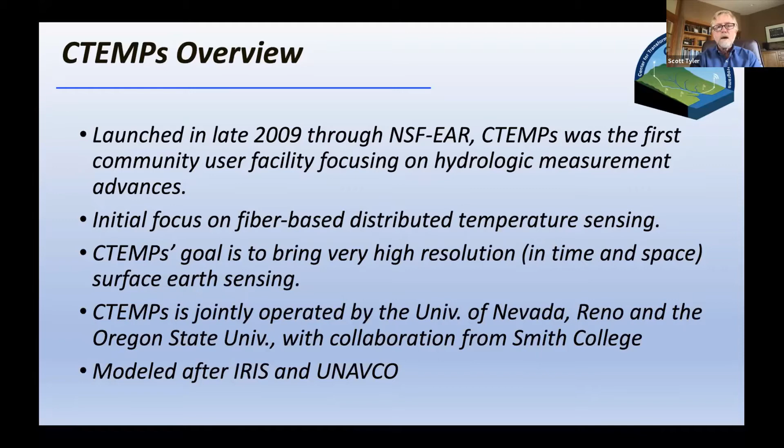And so our goal is to bring high resolution, both in space and time, surface Earth sensing. And you'll see we do some other things as well besides distributed temperature sensing. And again, it's jointly operated, funded by the National Science Foundation, at the University of Nevada, Reno, my home, Oregon State University, and also Smith College in Massachusetts. And we basically modeled ourselves after the successful instrument centers in earth sciences, IRIS PASSCAL and UNAVCO. So you'll see a lot of similarities. We are just much smaller than they are.

So currently, CTEMPS has a fleet of 11 completely field deployable distributed temperature sensing systems. And we have some higher resolution laboratory grade instruments that can also go out in the field, but just require additional power. We maintain a complete inventory of fiber, both single mode and multi-mode. We supply fiber splicing, supporting equipment, everything an individual or a team would need to use a distributed temperature sensing operation in the field. We maintain a data management system and storage of all data that comes in. It's freely publicly available as well.

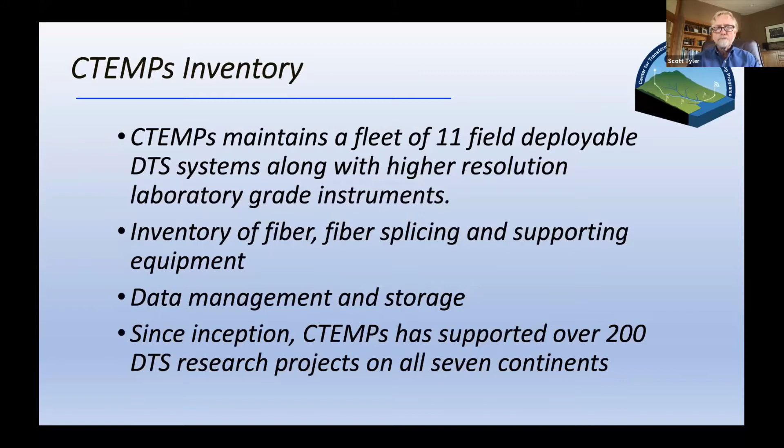And since we started, we've supported about 200 distributed temperature sensing projects, and we've been able to work on all 7 continents with those. So this is just an image of what one of our instrumentation boxes looks like. It's completely weather tight. All the data comes back by cell modem if you're within cell service. And we maintain the data for our users. It's completely self-powered, solar powered. And in this case, researchers were monitoring a stream system in Northern California.

And we've evolved from just distributed temperature sensing. We still focus on all aspects of fiber-based temperature sensing, as well as now you'll see a little bit of distributed acoustic sensing. Also, with that idea of focusing on high resolution space and time measurements, we've developed a UAS program that is available for the community to use. We focus on high resolution topography, hyperspectral imagery. The image to the right there is our airborne magnetometer, and we do thermal sensing. So if there's a need in your community for that, we can supply those kinds of instrumentation to you.

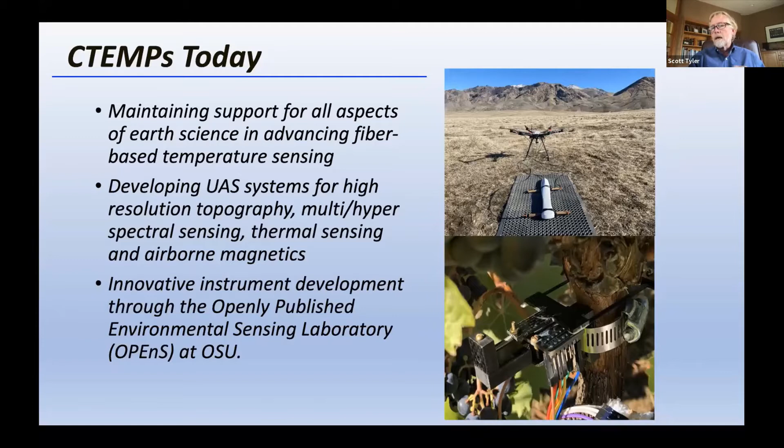And then we've also just in the last few years developed an instrument development laboratory called OPENS, Openly Published Environmental Sensing Lab. And this is designed for users to develop low cost instrumentation and sensors for, again, environmental sensing. The one to the right here happens to be a very low cost dendrometer, which is a technique to measure the change in diameter or circumference of plants, trees as they're growing daily. And we can use these instruments to look at water stress and vegetation. Normally they're very expensive. The idea is to make these things cheaply, quickly, and have users come in and actually work in the laboratory to build the instruments that they need.

Like everybody, we have a website. So this is what you would go to. You can request instrumentation. It's quite easy, much like if you've requested nodals from IRIS PASSCAL. You tell us what your experiment looks like, what you might need for instrumentation. If you're not sure, you just put down, I'm not sure.

And one of the focus things that we do is we try to work with all of our clients, if you will, to help design distributed temperature sensing or remote sensing experiments in the field. We keep a pretty robust list of publications that are related to distributed temperature sensing, as well as unmanned aircraft. So feel free to take a look there.

And then we do training. We do workshops, usually 2 or 3 workshops a year, always at the American Geophysical Union. We'll have a distributed temperature sensing workshop, hands-on. And we also support folks coming into our lab, either of our labs, to work hands-on to get practice with the instruments before they go out.

Because recognize in hydrology and in near surface, many people are very unfamiliar with how optical fibers even work. So bringing everybody up to speed has been one of the things that we've focused on, I think, fairly successfully. So I don't think I have to go into too much detail of how distributed temperature sensing works.

We do a quick shot of light down an optical fiber, and in our instruments we're looking at the Raman backscatter, which is a function of the temperature of the region that the scattering occurs. So essentially DTS is LiDAR, is inelastic LiDAR in an optical fiber.

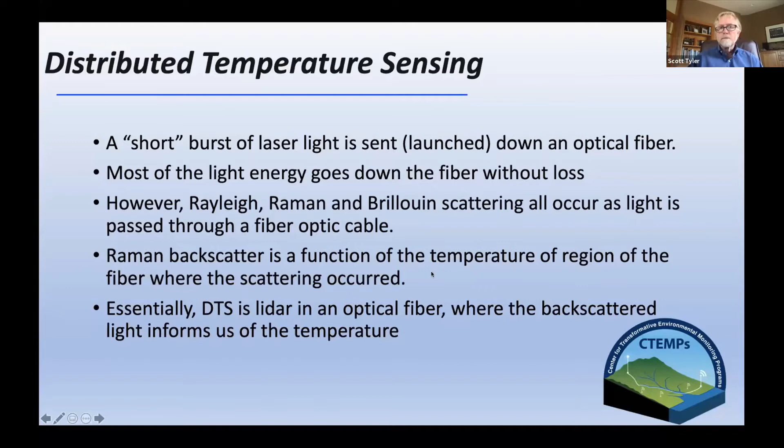Hello, come on, where'd we go? There we go. I think it's okay.

Just to give you an overview of the instruments that we maintain, obviously there's a lot of distributed temperature sensing instruments out there. Typically, the instruments we have will measure in a single channel, usually up to 10 kilometers of fiber. They're usually 4-channel instruments, so you can monitor up to 40 kilometers of optical fiber.

The instruments we have will resolve temperature differences, typically now down at 50 centimeters. So our spatial sampling is 25 centimeters, and our resolution is usually of order twice that, so about 50 centimeters. For most of our environmental applications, we're measuring temperature averaging over, let's say, a 10-second interval or maybe up to a minute, but we can go down to 1 hertz sampling.

And with the instruments we have, we can easily resolve 50 millikelvin differences in temperature, and we can get down to 10 millikelvin quite easily if we integrate longer. So in an environment where the temperatures are changing more slowly than our sampling interval, we can get it down to resolution approaching what oceanographers and others are interested in.

Everything is field deployable, and we now have instruments that will operate at down to 1 watt in daily use. And that was in collaboration, working closely with the folks at Silixa, who I think I saw Thomas this morning on the call. That was a demand for our community, particularly working in polar regions. We really needed to get the power requirements down so that we could leave these things out through Arctic or Antarctic winters.

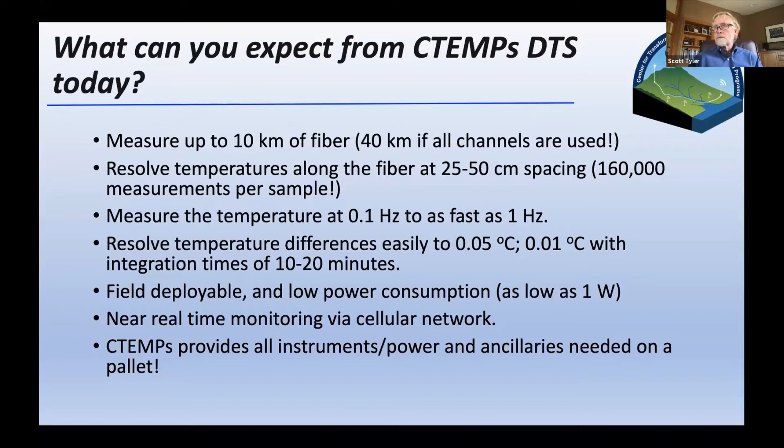Again, everything comes back by cell phone to us, data, so users don't have to worry too much about that. And again, we provide everything that a user would need out in the field for remote installation if needed. So I just want to show you one example of where DTS has been making some fairly significant breakthroughs, and that's in the cryosphere, particularly in the ice shelves of Antarctica and also to some degree in Greenland.

And if you're familiar with Antarctic ice shelf behavior right now, the big concern is that the ice shelves of particularly West Antarctica are being melted rather quickly, and these ice shelves actually buttress the much larger ice sheets that lie upstream of the ocean. And as the shelves begin to degrade, these ice sheets that are upstream can become destabilized and essentially fall apart.

And we've seen this, in the popular literature anyway, we've seen some of these big shelves calve off. The issue in West Antarctica is that because of the topography of the grounding zone of these ice sheets, once this process starts, it can actually run away, and the entire West Antarctic ice sheet could indeed enter the ocean.

And of no concern of the ice that's below sea level, but a significant amount of the ice in West Antarctica is, of course, above sea level. That will cause sea level rise. The challenge is, how do we measure what's going on? Most of the melting is occurring underneath the ice, so from the bottom of the ice shelves.

And this image is greatly vertically exaggerated. The distances here from the edge of the ocean, ice-ocean interface at the sea ice back to the grounding line where the ice is finally on the ground, can be hundreds of kilometers, typically 100 kilometers, or can be much larger. So how do we monitor what's going on underneath this in the ocean, and again, the melting that generally occurs from the bottom of the shelves?

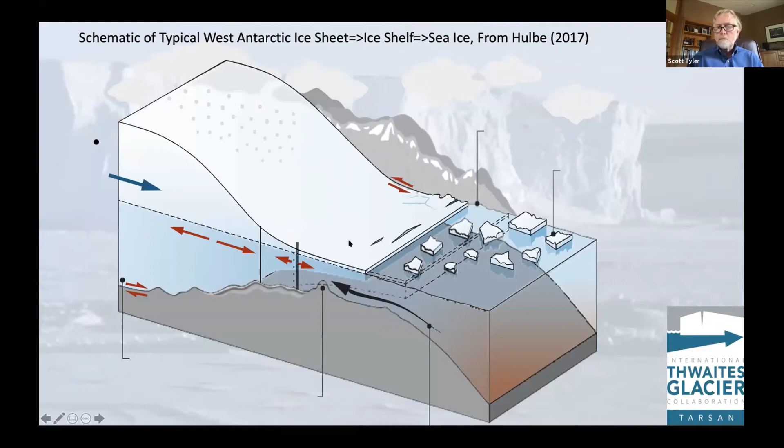There we go. So what I'm going to show you right now is some data from a mooring. This happens to be on the Ross Ice Shelf, where we've drilled through about 200 meters of ice, and we installed a mooring system down through the ice into the ocean below. And in that mooring, in this case, there's multi-mode fiber. There's also single mode fiber, because we want to go back. All of our installations these days include both single and multi-mode fiber, so we can do acoustics on anything that we have installed.

And what I'm going to be showing you is then the evolution. The bottom graph here is the ocean, underneath 200 meters of ice, what the temperatures look like. And then the top graph, let's see if we can get this to work, and I can talk through it while it's going. The top graph is actually the ice thickness above. And so this instrument is measuring as we go along in time, and remember, we're in the Antarctic, so February is summer, you can start to see warm water coming in underneath the ice. These are continuous measurements every meter in this profile.

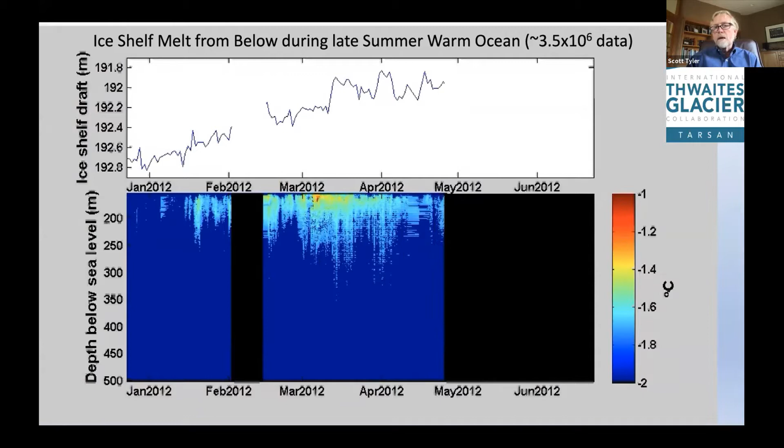And when I say warm, ocean temperature here is minus 1.9 degrees C normally, and we're getting up to perhaps -1. So that's warm water for Antarctica. And you can see it comes in, and then as we move back into the wintertime, this warm pulse of water, which comes in underneath the ice shelf, is pushed back out due to processes underneath the ice shelf.

But what we're interested in is measuring the melt rate of the bottom of the ice. And with DTS, again, our spatial resolution is 50 centimeters, maybe 25 centimeters in a good instrument. And here we're measuring ice melt that might be 1 meter per year. So our spatial resolution is insufficient to capture the melt rate at this particular site. Many other sites are melting at tens of meters over the summer, so normal DTS works fine.

So what we did here was, and this is one of the advantages of DTS, look not just at individual temperature measurements, but at the thermal gradient, particularly in the ice, and how that changes as the bottom of the ice shelf is melting upwards. Because we get very high spatial resolution, we can resolve the thermal gradient as we approach the ice-ocean interface very well. And we also happen to know, fortunately, the temperature at the ice-ocean interface. It has to be at the pressure melting point of seawater. And we know the salinity, so we know that temperature exactly.

And so as a result, we can then map where that thermal gradient intersects the pressure melting point, and we can now resolve ice shelf melting rates of order millimeters per day. So this is a little less than a meter over the entire 6 month time period. But we can measure melt rates of a few millimeters per day, which is impossible to do otherwise. No other way to do it. So kind of interesting, kind of cool stuff.

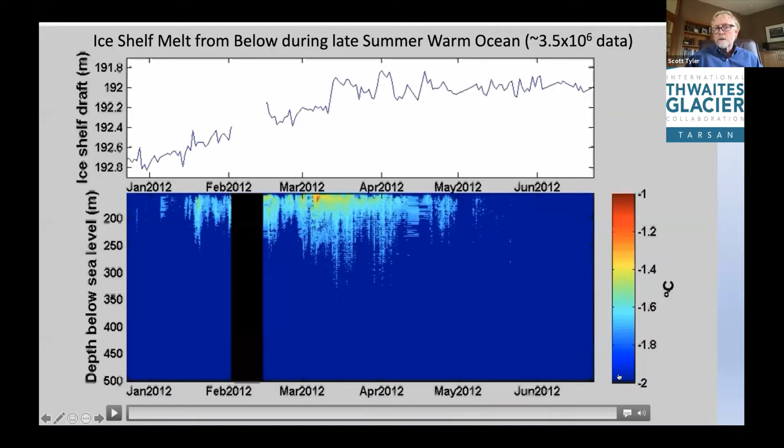Let's see if we can move forward. I just wanted to mention that.

So we have another set of experiments going on at the Thwaites Glacier, which is West Antarctica. Here we have 2 moorings where we have temperature measurements over the last 2 years from the ice-ocean interface, the ice and the ocean. That's been continuous, and now we will be going down this field season to measure. We also have single mode fiber there, so we'll be doing vertical seismic profiles in those moorings that are through the ice to measure ice properties, and we'll do some surface shots as well.

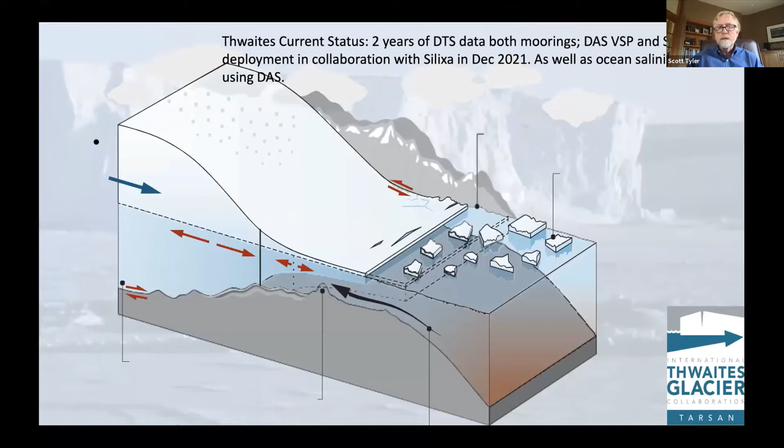We hope to be able to resolve differences in salinity in the ocean column below, which is also really important to identify ocean currents and ocean waters that are melting there. So that's ongoing.

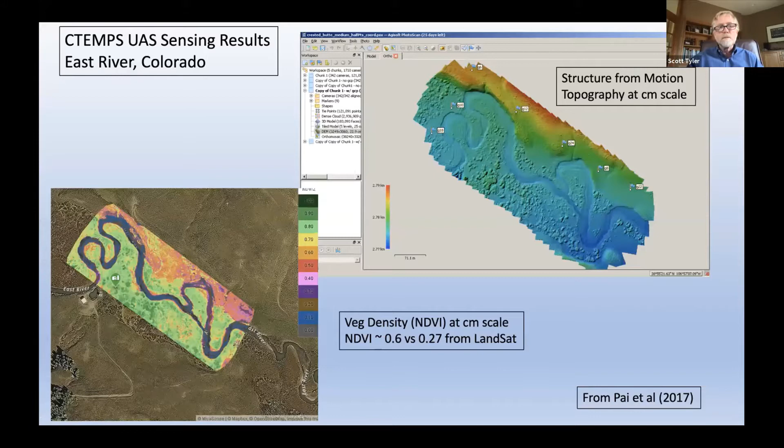Just really quickly, CTEMPS also does remote sensing. I just wanted to toss up very quickly that we do topography. This happens to be some work for Lawrence Berkeley Lab that we did in Colorado, looking at topography of streams. This is looking down. And then we also do very high resolution multispectral imagery to look at vegetation health. Those are all available. All right, so that is CTEMPS.

Let me quickly move on if I still have time. I don't have a watch in front of me, but we'll keep going. Brady will tell me when to stop.

A few years ago, Wang from the University of Wisconsin, IRIS folks, and us got together and said distributed acoustic sensing is a game changer for earth scientists, and we need to help promote this in the field. The National Science Foundation has a program called Research Coordinating Networks, or RCNs, designed to either advance a field or create new directions in a field by coordinating people working in that area. It's not designed to do primary research; it's designed to bring people together.

So we started up a year and a half ago with a DAS Research Coordinating Network. Several of the people in this workshop today are part of that, and we really appreciate their contributions. I want to encourage you to participate. Many of you on the engineering side may not have been aware of this as much as the earth science side, so please get involved. We have a steering committee. The goals are to bring together the DAS communities, research, industry, technology companies and agencies, and see how we can apply and advance applications of DAS in geoscience and engineering.

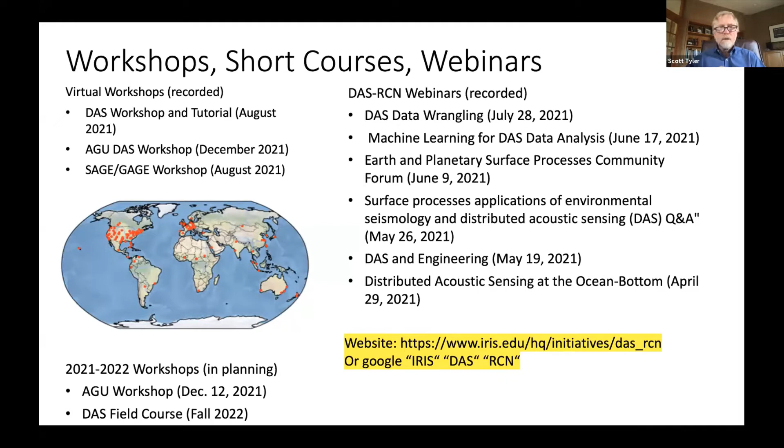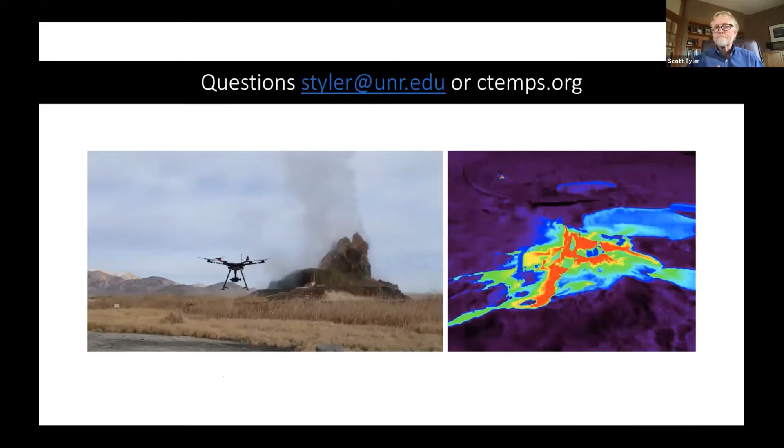And with that, I will close and take questions. Since there are a few geothermal talks, I thought I'd throw up a picture of a local geothermal feature and its thermal map as well. So thank you, and we'll stop sharing.

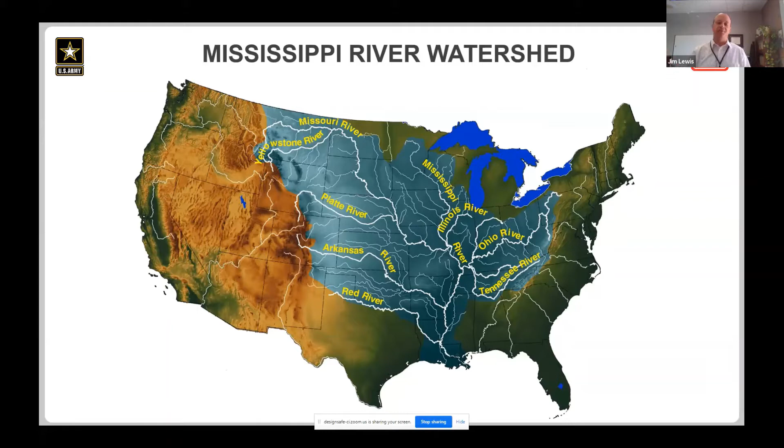I want to mention the 1927 flood. So this was a very important flood in terms of the history of the Mississippi River. It was devastating, a lot of damage, a lot of people that died, and a bunch of people that were forced out of their homes, a lot of refugees, and there's a lot of history in that event and how the whole nation was impacted by that event.

So the 1927 flood was a big event, and it resulted in the federal government deciding we needed to do something at the federal level. And so the 1928 Flood Control Act was really motivated by that 1927 major flood of the Mississippi River. And so in this act, Congress gave the Army Corps of Engineers the authority to do flood risk management on the Mississippi River through this MR&T authority. So it's the Mississippi River and Tributaries Project.

So just a couple snippets from some of that language. One of the things that it did was it put the Mississippi River Commission and the Army Corps of Engineers together, to work together and perform this task as a unit. And that still happens today. And that last bullet talks about trips up and down the river, and that also still happens.

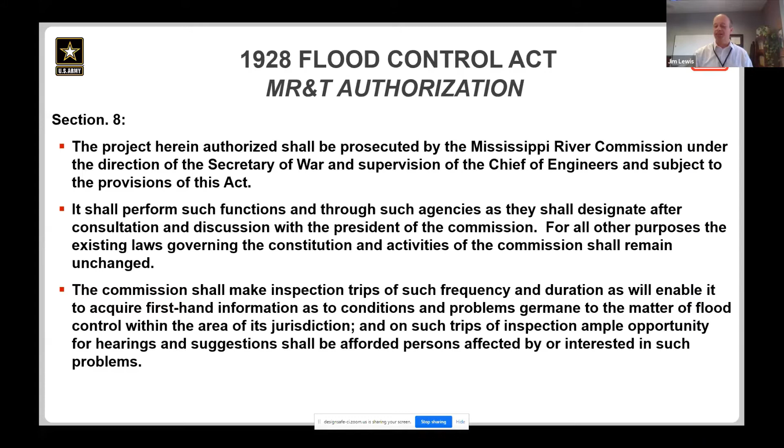So twice a year, once during higher water, once during lower water, the leadership for the Mississippi River Commission and the leadership for the Army Corps of Engineers get on a boat and they travel down the river and have stops in cities and towns along the way to hold public meetings, allowing folks to voice their concerns and their perspectives about the job of managing flood risk in the Mississippi River.

So after the 1928 Flood Control Act, the Army Corps of Engineers became much more involved in levees, levee design, levee inspections. That figure on the left just shows how they were designing different slopes for different materials. The top figure shows a cover of a book that was standard instructions for levee inspectors in the Vicksburg district from 1929. That figure in the top right shows construction methods have changed a lot over the years and how they moved the dirt around. That figure in the middle right shows an old sand boil that they were dealing with.

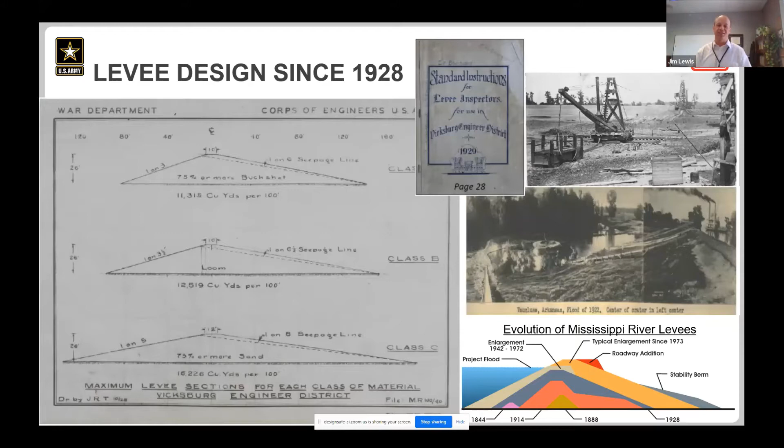And then that figure in the bottom right, I just want to highlight that there's an evolution that's happened in these levees over time. They started with some part of a levee, and then that's grown or been built on over time, so that it's evolved into the current form.

This slide has a lot of information in it. So the Mississippi River and Tributaries Project is not just levees. There are actually 4 different major features of the MR&T project. Levees and floodwalls are, of course, a big part of it. But also there are floodways and backwater areas. Those are listed on the bottom left, and they're also shown in that middle map as well.

So at the upper end of the system, the MR&T system has a geographical extent that starts at about where the Ohio River and the Mississippi River come together. There's a city there called Cairo. The floodway right there at that location is called Birds Point-New Madrid floodway. That one is kind of a release valve to have flow come off of the Mississippi River. And the key with that one is the timing.

So the water that comes into that floodway ends up back in the river, but it is intended to knock the peak down. So that one is all about the timing to take the peak of the event lower in the system. And then as you walk down the system, there are backwater areas. These backwater areas are intended to give the river room. As the extreme flooding happens, these are locations where it's intended to flow out of the river and into these areas to take water.

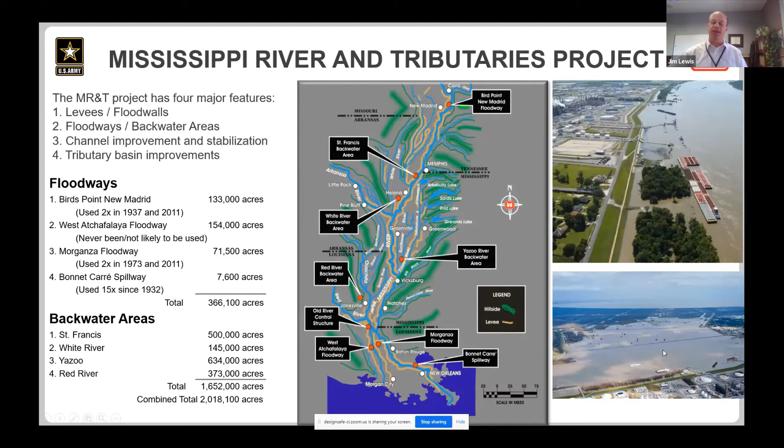And then this is my last slide. The Mississippi Valley Division has a science program known as the Geomorphology and Potamology program. Potamology just means the study of rivers. Through that program, we perform a wide range of science, and the levee research that you'll hear about in later presentations is funded through this program. We recently completed the Flowline Assessment to calculate what the water surfaces would be all the way through the system for the project design flood event.

We also track sedimentation trends. There are spots where over time, for the same flow rate, water surfaces are going up, and other locations where they're going down. We also look at basin changes in land use and water yield. The top right figure shows a numerical model example of how we're improving our tools to simulate hydraulic and sediment behavior. The bottom right figure shows threatened and endangered species whose habitat values we work to improve. But the levee research is important.

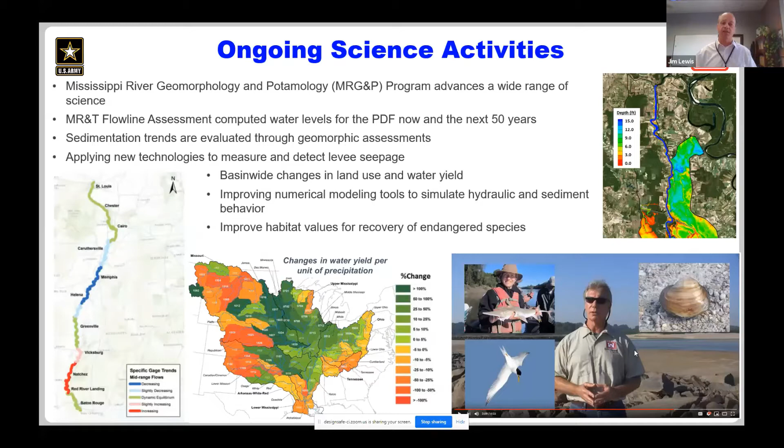During a flood event, there's a lot of activity that we as the Corps perform to monitor the thousands of miles of levees that we have, inspect them, look for seepage concerns and potential sand boils, and deal with those. So I hope this overview of the Mississippi River and motivation for levee research has been interesting.

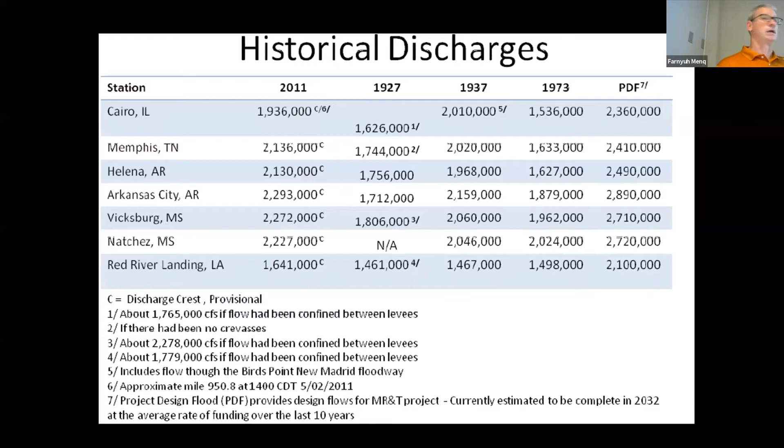So here are peak flow rates through the system during this event. And the thing to notice is if you look, for example, at Vicksburg, the flow rate is the highest we've seen and the highest since 1927, even higher than what happened in 1927. So the system, for much of it, was loaded beyond what it had ever been loaded before. The places we're going to look at are the old river control structure, the Morganza Spillway, and then right here near the LSU campus at Duncan Point.

And here's the old river control structure. This was built in 1964. That center gate is the main part of that structure, and it separates the flow of the Mississippi. 70% stays in the Mississippi Channel and 30% goes into the lower Atchafalaya. When there's a flood, they start sending more water into the lower Atchafalaya. And during 1973, they were sending water through that structure, and a 30-foot deep scour hole formed at the toe of that structure, and there was a distinct possibility that they could lose that structure during that event.

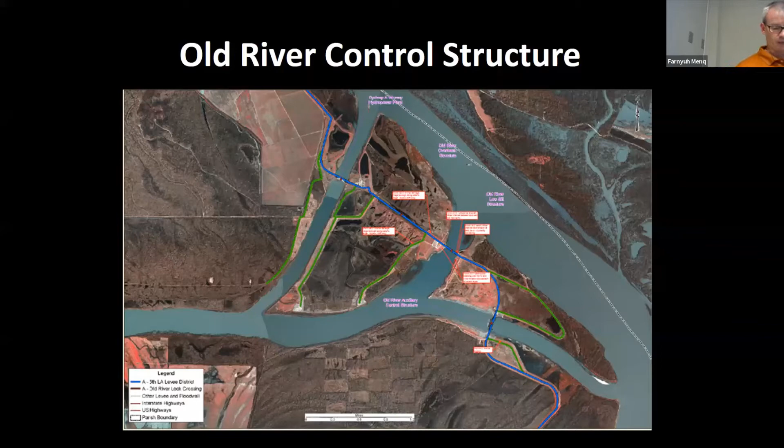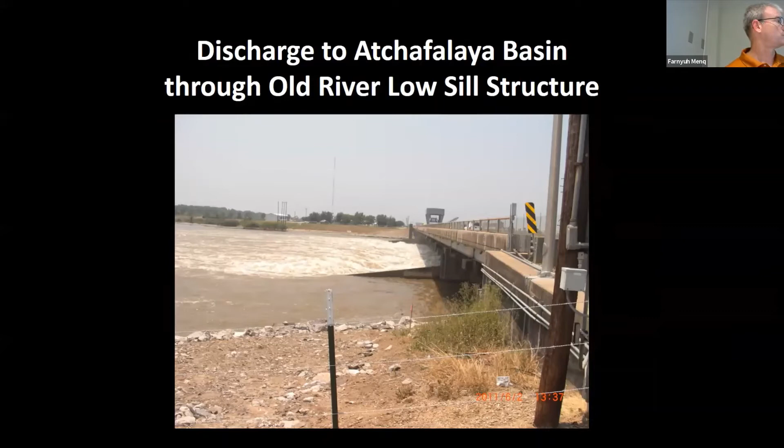So they added the auxiliary structure above that in order to try to control the flow rate going through that structure. But it's a significant structure because if you lost control at this point, you essentially lose control of the Mississippi River, and it would bypass Baton Rouge and New Orleans. So here is that control structure in 2011. It performed well. It performed in the way it was intended to perform. So that was a good news story here.

The Morganza Spillway is a little bit further down. And here the Morganza Spillway, again, is at pretty much its capacity in terms of discharging into the Morganza floodway, which is about a 5-mile floodway before you get back to the Atchafalaya River. And again, this structure in this particular event performed well, but it was dealing with very, very high flow rates, very significant potential for erosion. And so understanding what's going on in these structures during these events is a very important part of making sure that things are going to go well.

And then when we get down here near the LSU campus, here's what the levee looks like. This is on the east bank of the river. The flood levels along this stretch of levee in the vicinity of the campus and going all the way up to the old river structure were at the freeboard. So they are at the highest level that's intended. In some locations, it got above the 3-foot freeboard, and so they were adding sandbags and HESCO baskets on top of it to increase the freeboard temporarily during the event.

And you saw a schematic of what these levees generically look like. I'm going to talk about what's underneath them. So there's a blanket layer that's fairly fine-grained, and then there's some more coarse-grained materials, and then a substratum sand layer. And so what we worry about is the seepage going through those layers underneath these levees, potentially causing internal erosion or potentially causing instability. And here's an example of that seepage. Just happened there.

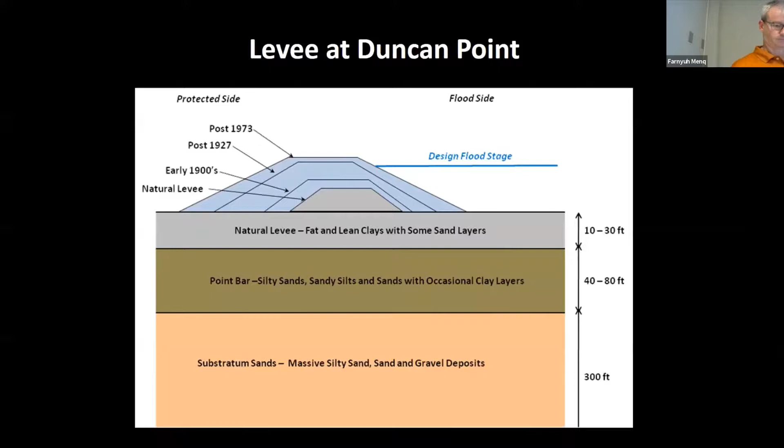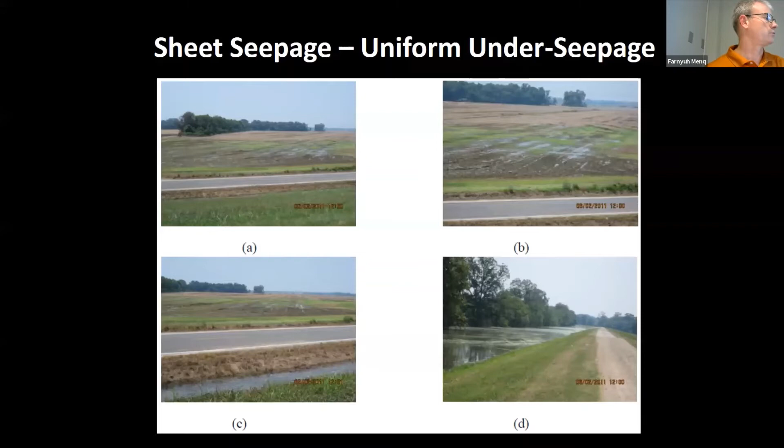So sheet seepage is the best example, where the water is coming under a fairly low gradient. It's not concentrated, and it's basically just coming to the surface at the toe and beyond the toe of the levee. So here's an example of that. This is just north of where we are right now, and you can see that field is filling with water, but there's not a concentrated flow through a particular feature.

The next feature are these sand boils that Jim talked about. So there were about 30 of these that developed along the system during the 2011 flood. During the flood event and the flood fight activities, what they do is they either pile sandbags or they put barrels on top of these sand boils so that the ground surface has a water head on top of it at that location, which slows down the flow rate. It slows down or reduces the gradient and hopefully reduces the erosion that's occurring.

You can see here one where they've placed the barrel, and another one that right after we were there, they put another barrel over that sand boil. These are interesting. They're right along the line of a utility. And so we don't know if maybe there were utility poles that used to be at these locations that they've removed, and that something that we did put holes through that natural blanket, or if there are natural features that cause them.

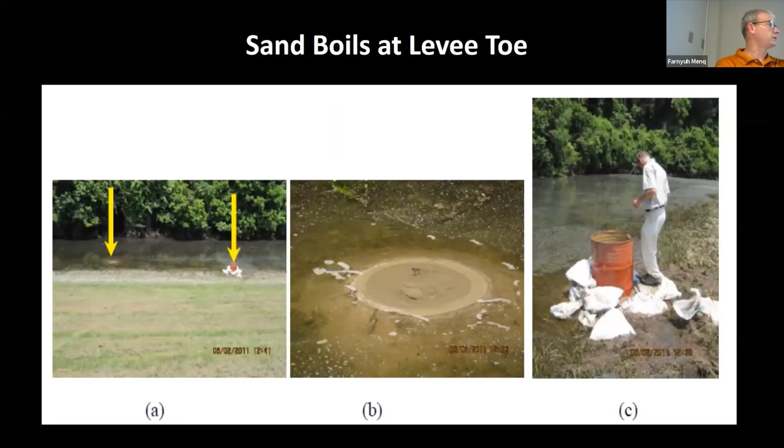One of the interesting things about this flood event was that there were locations where they've had sand boils before, and we found sand boils again. There were locations where they had never had sand boils before, and new sand boils formed. And then there were other locations where in the past they had had sand boils, and sand boils did not form in this flood event. So it's not only variable spatially, it varies with time.

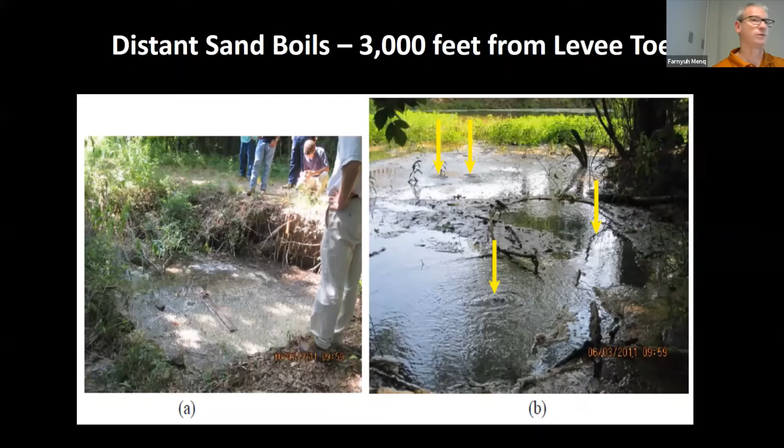And then there are some of these distant sand boils. These were really interesting. This is 3,000 feet away from the levee, just south of here on the east side, where sand boils formed. And it's not that big of a deal, potentially, in terms of the stability of the levee, although obviously water is going, and if you've got piping, it's over a large distance away from the levee. But these sand boils can form in areas where there are other things, like here is a berm that supports a pond. So potentially that berm could have been undermined.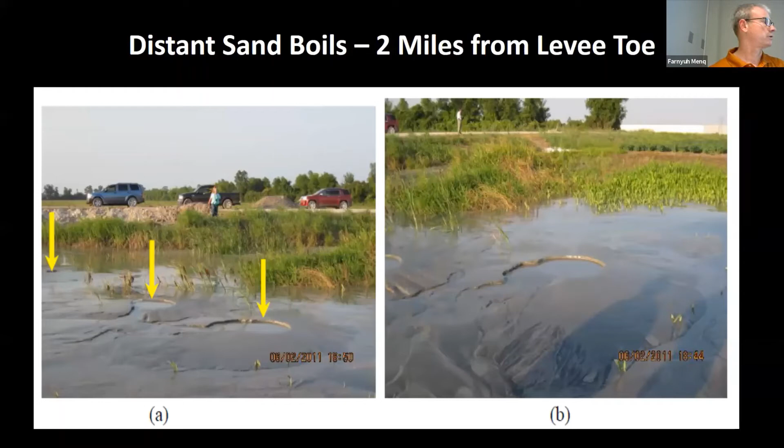And here we're 2 miles away. This is on the west bank, but 2 miles away from the river. You have dry land. We drove over it. We get to this point, and the water has popped up and actually taken out a road at this location. So it's a really, really interesting geologic setting that we're dealing with.

And the way that they try to address problems where they're getting seepage or they're getting sand boils is they extend the width of the levee with seepage berms. They put relief wells down into that substratum sand, but it's very much of an observational approach. They see where there are problems, and then they put these features in to try to improve the capacity of the system based on what they're observing. But it would be a much better approach if we could figure out what's really going on in the ground and be proactive about making those levees as strong as possible.

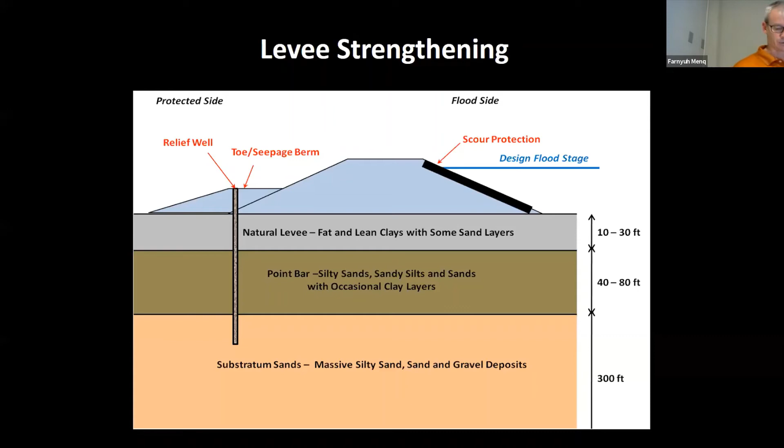So in summary, we had a historic load on the system. It performed very well. It's spatially variable though, it's temporally variable, and I think there's a lot of potential for what you all do that could improve our ability to make it a better system. Thank you.

Okay, thank you for that, Bob, for helping us set the stage. We have another presentation up next that I think will go further to set the stage for the specific section of levee that we're talking about. We have Brian Jordan, who's going to speak to us. Brian is with the Vicksburg District of the U.S. Army Corps of Engineers, and he is the Analytical and Levee Safety Section Chief for the Vicksburg District. And so Brian will be talking specifically about the section of levee that we'll be visiting tomorrow.

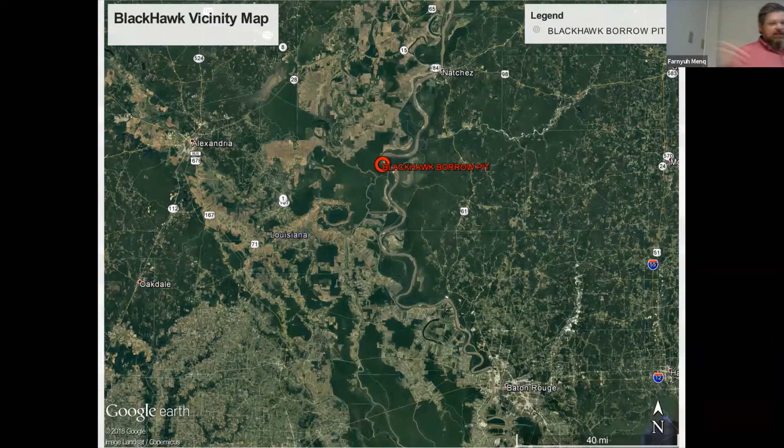As you can see, Natchez up north. It's pretty far north of Baton Rouge from here, and then directly east of Alexandria, Louisiana. This is really what I wanted to get in on, the important part of where the location is, because any kind of breach along the Mississippi River levee is an issue. But this one was 10 miles north of Old River Control Structure. As you see, just to the west there is the Atchafalaya River.

So you can imagine that a breach on the mainline Mississippi River levee at this location would dump water directly into the Atchafalaya. And there's also quite an elevation difference between those two. So there was a potential, and we didn't even get close to realizing this potential, of partially and temporarily rerouting the Mississippi River down the Atchafalaya. Obviously, it got a lot of people's dander up. So we were sent out to take a look.

And as you can see, that's very telling. There's a sand boil that's lipping the top of the water. You could actually watch the waves break on the sand. And as you got on top of it, you could actually see the material rolling in the throat. We sent a team of surveyors down with a multi-beam drone boat. We got this imagery. As you can see, it's obvious, right? There's a large sand boil. This pit was 8 to 11 feet deep. So that is an 8 to 11 foot cone of sand with a delta.

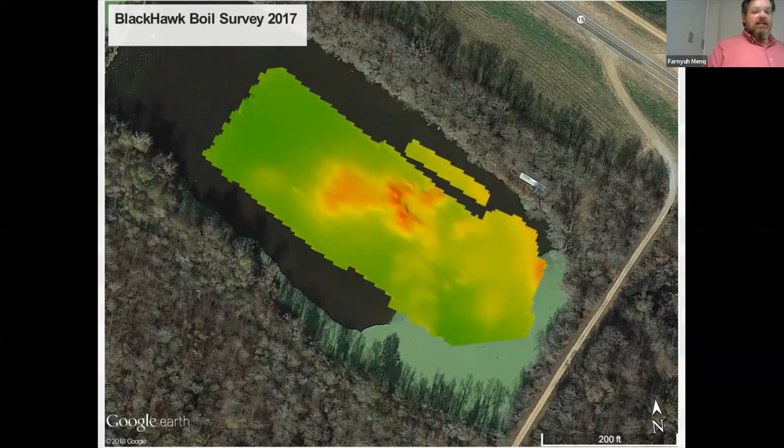So we knew, given the location and the situation, that we needed to do something, and we needed to do it before this flood wave hit. Luckily, with the Mississippi River, we had time. We had about 3 weeks to plan and execute our remediation. So we started off with, what are we dealing with? The geology. We went and looked at some tertiary borings and geological maps.

So you can see we're in a back swamp area that has got a lot of natural levee, not your usual sand boil location. And the boring you see there on the right gives you another indication that we shouldn't be seeing boils in this location. It didn't make any sense. That top stratum was 28 to 35 feet thick.

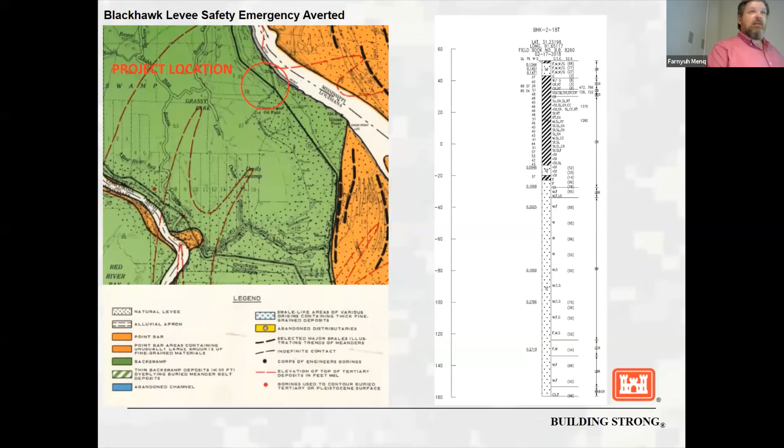Usually that's all you need and you're fine. You'll never put a relief well, you'll never have to berm, it'll be fine. And yet here we had this massive sand boil. So we sent our CPT crew to go push some cone penetrometer tests, for those of you who don't speak the acronyms, at the landside and riverside toe.

And this one caused a couple of hats to drop. Those are sand layers that are 5 feet below the ground surface. What? This would cause a serious seepage issue. But it did not make any sense in conjunction with the sand boil we saw. The elevation of the effluent of the sand boil, down there at the bottom of that pit, was well below these layers. So, you know, the water flows down in elevation, then up. Didn't make a whole lot of sense.

So we did something that we typically don't do, and we pushed a CPT through the center line of the levee. We don't like messing with the levee section itself, but in this case, it seemed like the right thing to do. And thank goodness that's not what was going on. These sand layers were only found at the toes and not in the center line. So it was not continuous.

The best we can figure is when they designed this, they were having problems meeting their stability requirements. And they decided the best way to get around that, since they had such large top stratum thicknesses and probably weren't going to have any seepage issues, was to add sand and gravel stability buttresses underneath the wings, so to speak, of the levee.

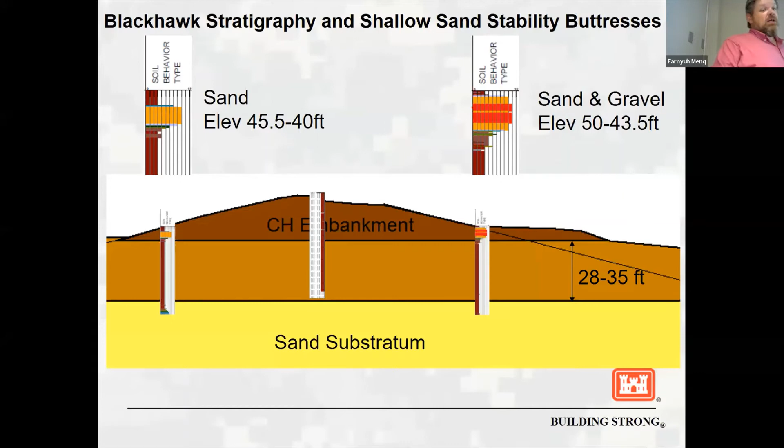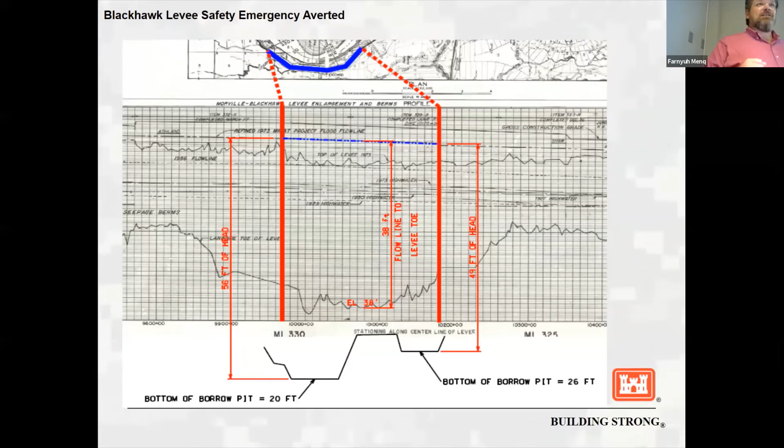Still had no idea what was causing the boil until the surveys came back. The cross-sectional surveys gave us an elevation at the bottom of that pit. We compared that to as-built crest and landside toe elevations as constructed, and we realized what we were actually dealing with. 50 feet of head across a river levee. This is not something that we typically see at all.

And as you see, there's a lot of difference in elevation between the riverside, the landside toe and the bottom of that borrow pit. So you're losing some of your top stratum there too. So not only do you have 50 feet of head, but you also have a reduced thickness in your top stratum. And that was the magic key to the equation, because when we started putting that into the analysis, it started showing us that in 2011, we actually would have gotten heave.

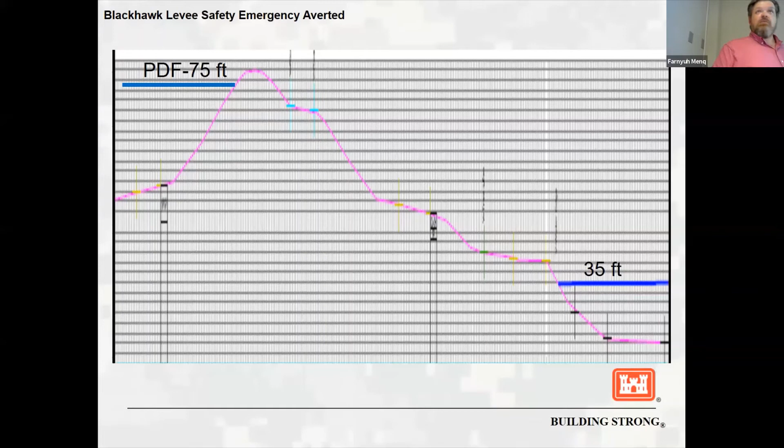And once you get heave with that much head and you have a fracture, or you have a defect, then Katie bar the door, all the seepage in the world's going to come through until you do something about it. As seepage goes, you have a couple ways you can deal with it. With sandbag rings, you can equalize the water pressures, right? You reduce the differential head across your levee's cross section. That was certainly something we looked into and something we ultimately did.

We built up a small levee around the borrow pit, but we weren't able to get a whole lot of water stacked on it. We didn't think it was enough. Not to mention, if something happened to that line of protection and it blew out, all of a sudden you would have a huge increase in head differential and could cause a real problem there too.

So what we decided to do was to add material on top of the sand boil location. Now we said sand right here, but frankly, we would have used any material available. We just needed weight. We needed that overburden weight on top of that location, so that seep water can bleed off without actually carrying any material with it. We capped that with 57 stone.

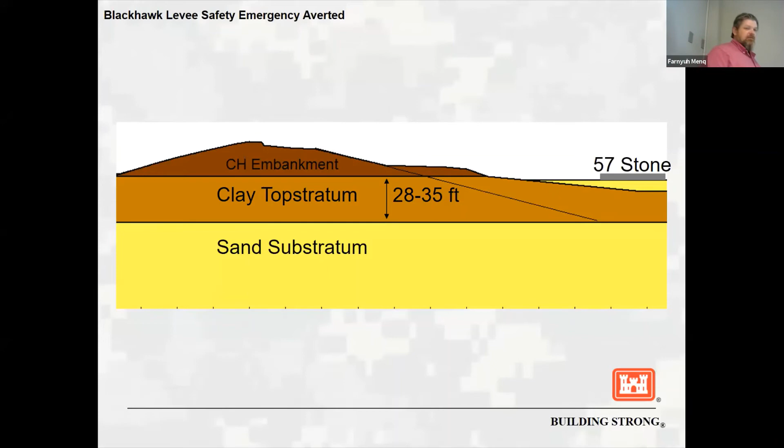This was something that was used to great effect during the 2011 flood in some real bad sand boils close to the levee, in I think Winterville and somewhere else. They basically dumped a filter down the throat of an active boil, and it worked a treat. It stopped the material movement, clear flow.

So what we were thinking with that is, worst case scenario, this thing blows up or we have a project flood before we can get the final remediation in place. This is there to fall into whatever opens up and actually filter the exit possibly. But we were really after the weight.

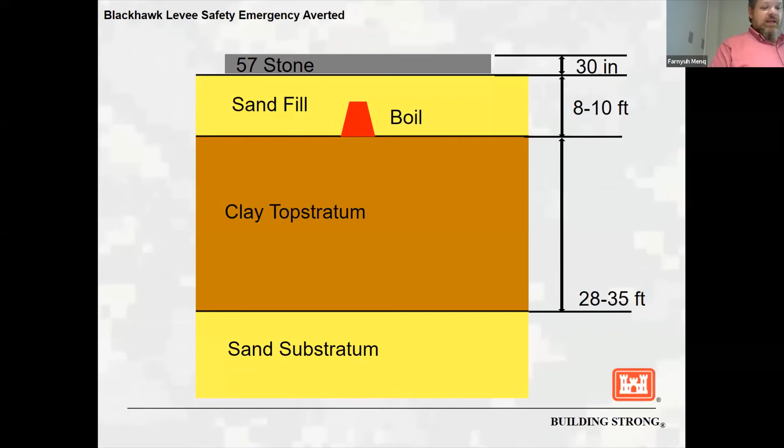So where do we get the material? We looked around. You're in the middle of nowhere, and Louisiana is flat. There's no hills to go crop and get material from. So we were caught between a rock and a hard place, so to speak. We couldn't dig another hole because that's how we got in the problem in the first place. So what we landed on was this large sandbar across the river.

So now we had a plan, we had a design. So we developed an emergency contract, hired some contractors with the aid of our own hired labor crews who do a lot of slide repair and menial jobs for us in the Corps. We got to work. It was a mess. It was an absolute nightmare.

It's the exact opposite of the 2011 flood. 2011 flood, we had a drought. Everything was dry. You could drive anywhere you wanted to. This was a sloppy nightmare. The only silver lining was that there was a training dike across the levee from the site that the barges were actually able to pull up to and unload on.

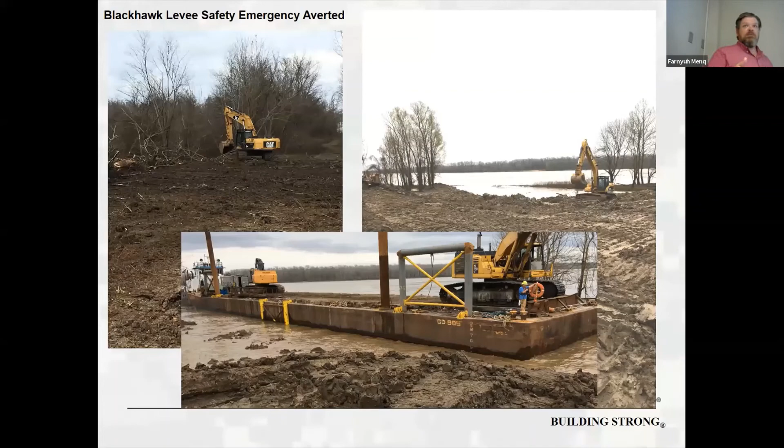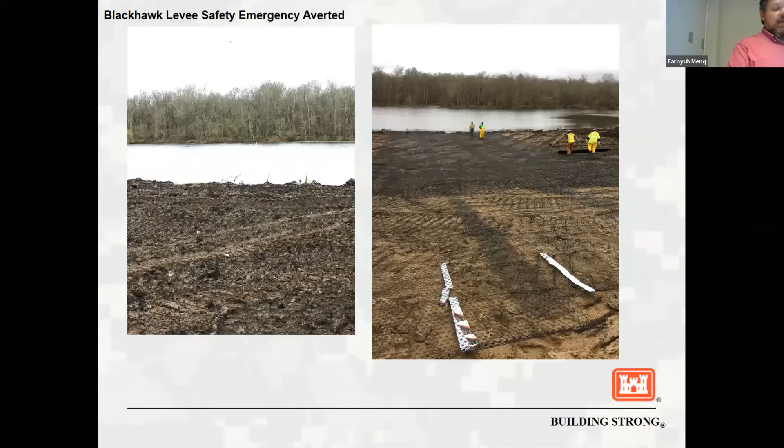But it was silty material and rutted, and we ended up having to use triaxial geogrid to give us a foundation we could drive on. That's actually underneath this entire site now and forever. That's them unloading off the barge onto the large... We use large off-road dump trucks.

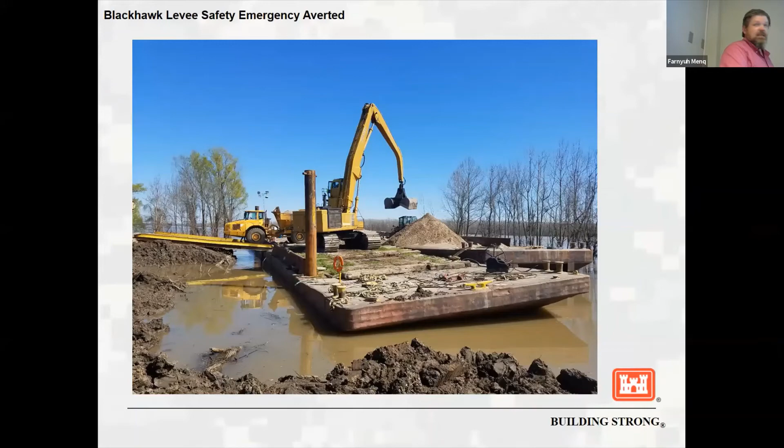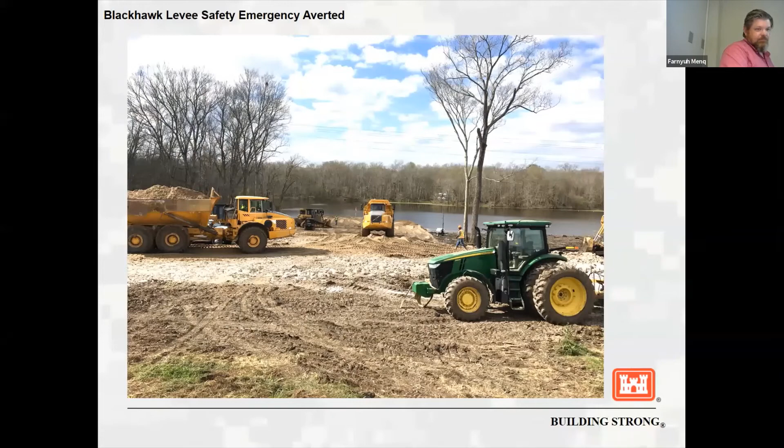Had a hard time maintaining the roads until we went full bore and just dumped A-stone from Old River structure everywhere and just drove on top of it. There you can see the A-stone that the trucks are riding on. That's them constructing. You'll see that on the right there, that's the dike we were using to offload.

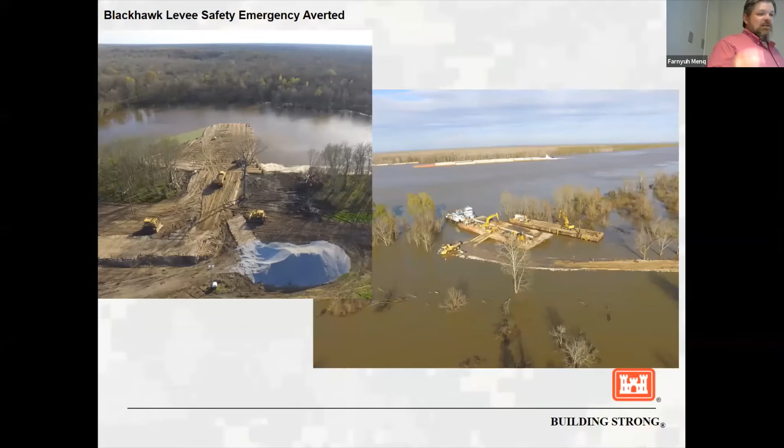Well, the river is coming up. So we started losing our dike. And so we literally just had to march the offloading operation closer and closer to the levee until they were actually unloading the sand barges directly onto trucks onto the levee. And there you can get an idea of the flood loading we were looking at too. It was a substantial flood loading.

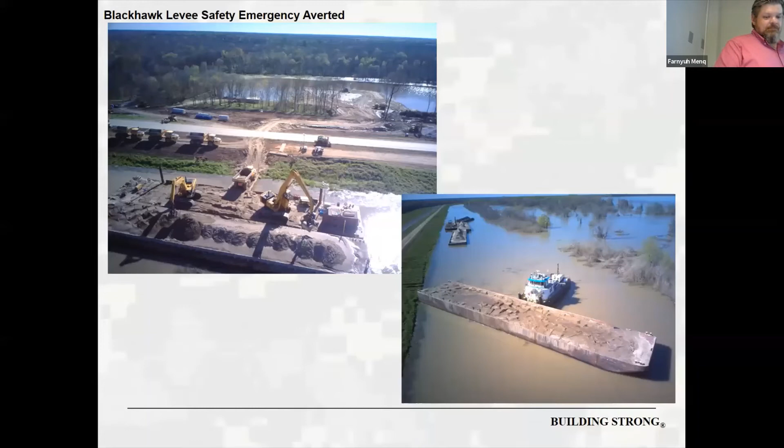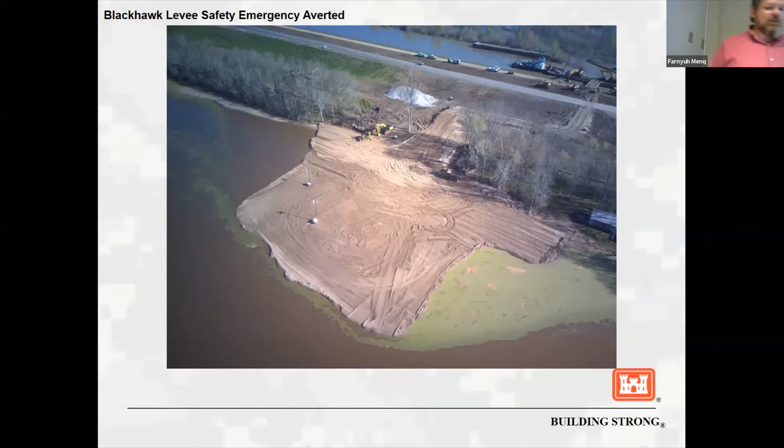That's the finished pad. There's a white dot in the middle right there. That is the sand boil location. We basically tried to center up this entire pad around that and then centered the 57 stone on top of the boil itself. That's the finished product.

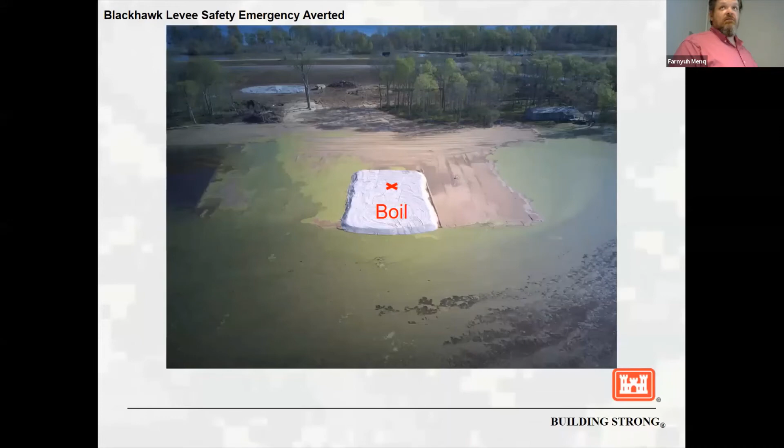And as you can see, the effort to bring the water up in the borrow pit actually worked pretty well too. Wasn't much effort done there, and it gave us about 5 or 6 feet, which bought us time to get the rest of it finished. And that's the scary one. So that's really what the situation was. That's the Mississippi River in the background there, and the borrow pit in the foreground. That's how close we were.

Happy ending for sure. Everybody did an amazing job, right from the contractors to our own guys to the contract experts back at the district office. I mean, they were working 20-hour days. I felt so bad for those guys. But it all got done in the course of, I think 12, 13 days, we went from nothing to a finished product, which was quite astounding.

And it was done before the crest. And we had no signs that it had moved since. So since then, we've installed relief wells. So we are very confident that there will never be an issue at this location again. If there is another sand boil, the relief wells will arrest any kind of progression to the levee. Wow. Brian, thank you for the presentation.

Sure. Super interesting. I was out there yesterday. I saw things, but seeing what was going on and how you fixed it, it's sobering. And I look forward now to going back tomorrow and looking at things in a new light, now that I've seen the background information. So those of you who are participating in the tour tomorrow, you'll get to see the gravel blanket, the relief wells, you'll see where the fiber's at and stuff. So very excellent. Thank you, Brian. Thank you.

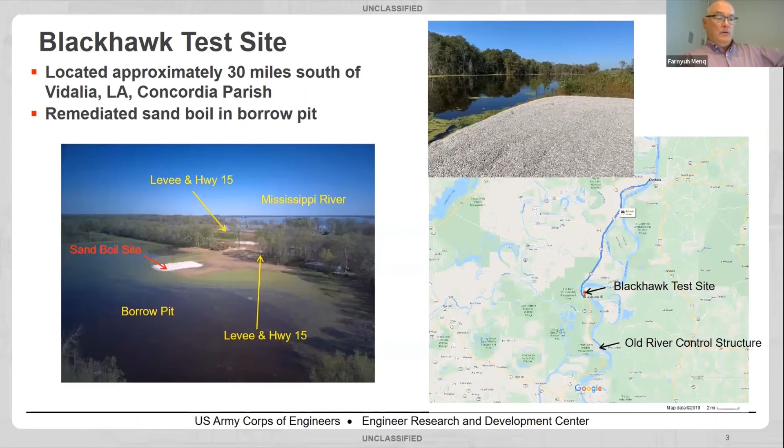And that shows the map with the Blackhawk test site in relation to the Old River control structure. I put this together, but it looks a lot like Brian's slide. I didn't steal this one, but you can see where our site is in relation to the Red River here, and that's, I think, why the property owner got so nervous. And there's the, oh, I'm supposed to stand behind there, in relation to the Old River control structure.

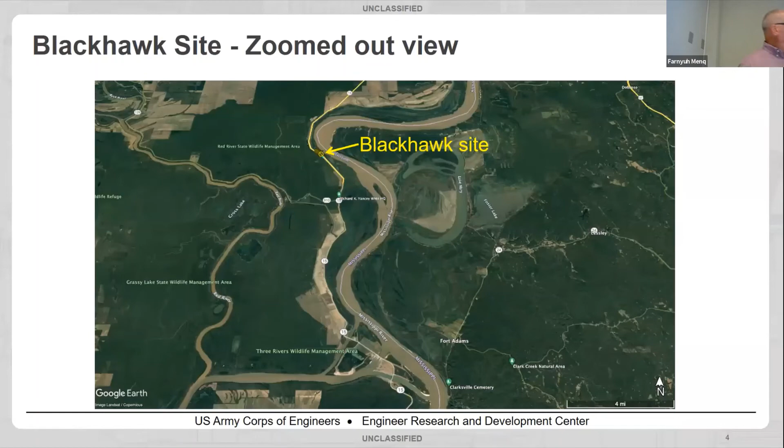So Brian mentioned the relief wells they put in. When we first started going down there, they were just going in, a row of a baker's dozen relief wells along the side. You'll see them. They're yellow, and when the river gets to 40 feet at Natchez, they're flowing. I've tasted the water out of them. It doesn't taste good. I thought it'd be pretty fresh. It tastes like sulfur, so don't do that.

So in the sensing, we're doing DSS and DTS, as I mentioned, and the DAS, we're going to see what we find out from the passive, but also with the active seismic. And I think we're going to get more than we bargained for with all the data we took yesterday and that we're going to take tomorrow.

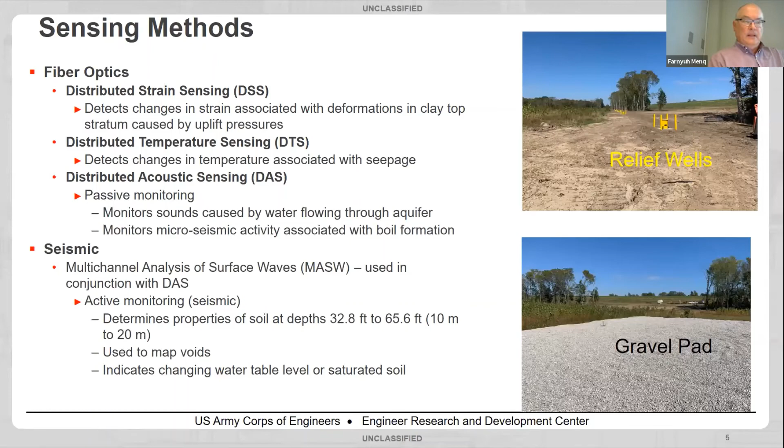So earlier this year, we had a heck of a time getting things installed. We're probably a year behind schedule, what with COVID. And then, as I mentioned, I'm not a geotechnical engineer, and I'm not a levee expert. And I learned there's a thing called permits. So we had to get a permit from the levee, and that was a long, involved process. But then also the COVID. People really don't like it when you dig holes in their levee, we learned.

So we went out there anyway. It was wet, and we tried to first trench the thing. We had a different fiber, and that didn't go well because it was clay and it was clogging up, and our trencher wouldn't go. And then the tech said, you know, we could plow this in a day. And so we switched to our cable, to the armored cable. And truly enough, they got it done in a day.

But you could see, you saw in Brian's slide, there's kind of a bench or a shelf, and then there's the lower part next to the thing. At the lower part, it was real wet, and you see at times they had the skid steers pulling the plow. So we plowed it in, so the cable's coming up here and plowing in. You have to have a pretty strong cable, it has to have that strength. And so he's pulling it back there.

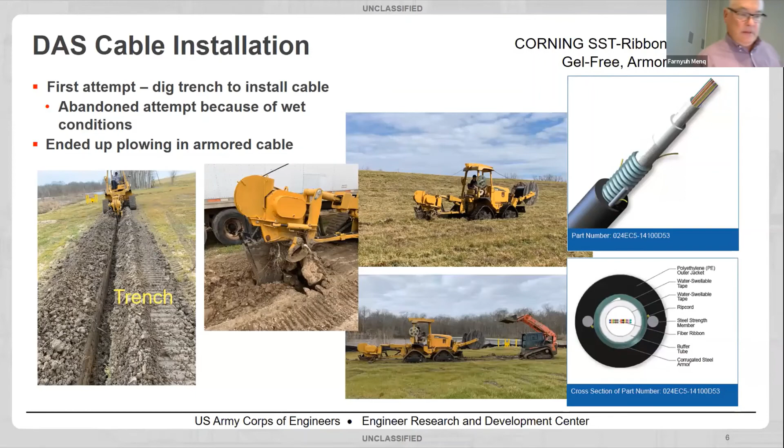But once you got on high ground, it did really well. And there's the cable on the far right. And there's then the finished product. I think y'all are going to get these slides.

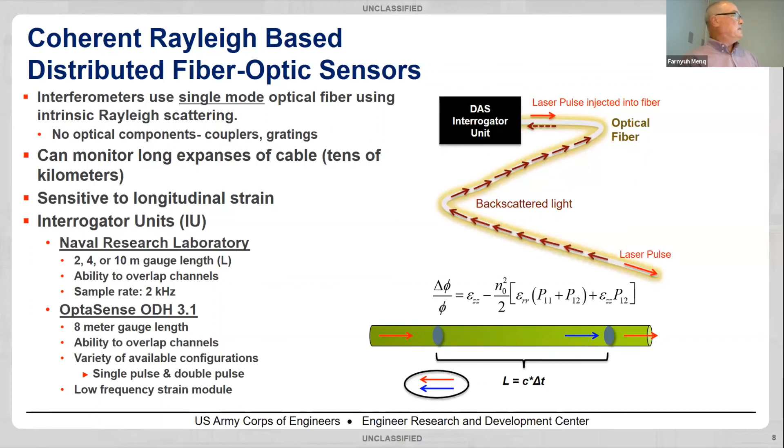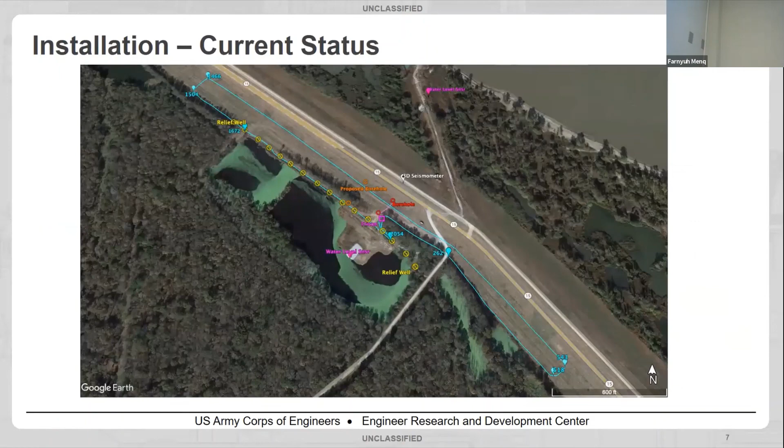We put a 3-axis seismometer on the crest of the levee. It's about this location. I should have gone back. Can I? It's right here, the seismometer. About right here. So it's about 950 meters or so.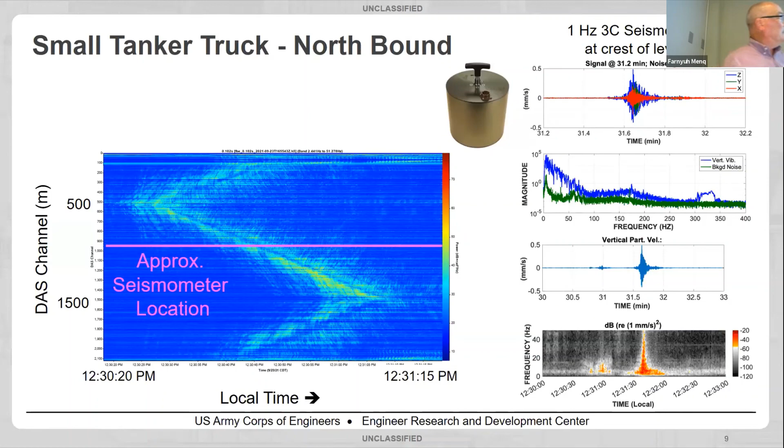And you can see, just as a reference, half a millimeter per second is the amplitude of the thing. It's a 3-axis, and you can see the spectrum that we're getting.

And here's a smaller southbound vehicle. At first, I thought it was pulling a trailer, but then I looked. There's about 10 seconds between them, and at 60 miles an hour, I figured out it's like 260 meters, so that'd be a pretty long trailer. So I figured it was a smaller car following a truck.

And I think Peter has some interest in using sources like this to do the MASW type and to get the sound speed profile.

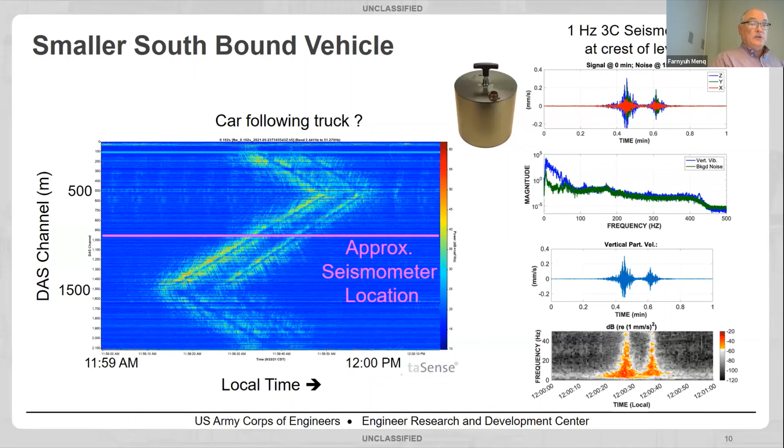So Dr. Soga showed this. I didn't take these from him. We must have stolen from the same place. But anyway, this is their interrogator. So basically, use a Brillouin. I'm just going to mention that the cable, I guess it's 2 separate cables. It has a loose tube and a tightly buffered, so that we could track the temperature from the strain and get both strain and temperature.

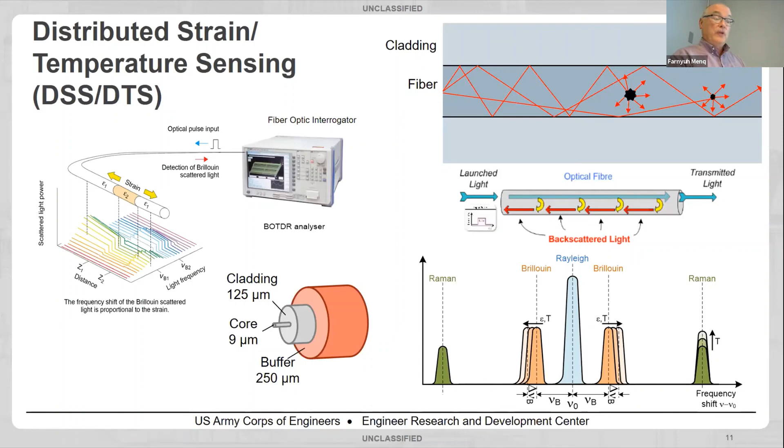I also want to mention the Berkeley guys, along with John Murphy, designed the borehole and how we were going to do it. John came up with a great test plan. There he is. I don't know how he manages to stay clean. So there's the business end.

So you got the fiber and it's wrapped around this tremie pipe. So the fiber goes down the pipe and back up. So actually you got 2 tightly buffered going down, or just 1, right? 1 DAS tightly buffered, and then our DSTS has strain down, temperature up. Yeah, so we got a DAS cable down there, and then the DSS DTS cable, so we can do that.

And so this is tremie pipe before they put it in. Then they put it in, and they keep adding sections of it; it's basically PVC pipe. And there's the end result on the far right, with the box and ready to put the clamp on it, so that when they come and mow the levee, it's not going to bother our stuff.

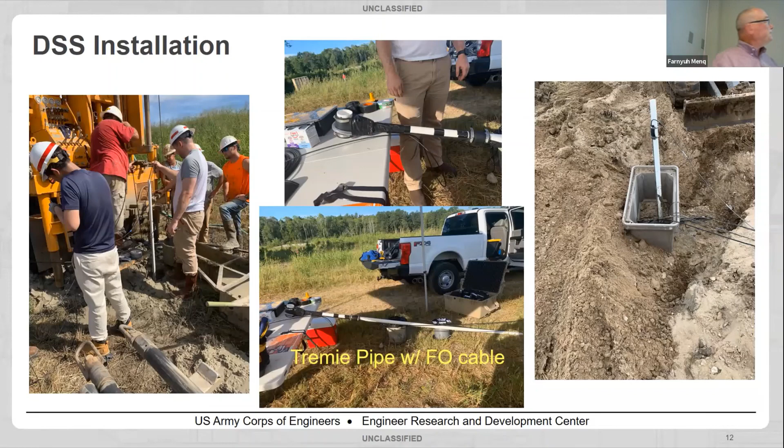And there's a schematic of also within that pipe. We got some piezometers to compare, and I think within the piezometers there's thermocouples, so we can measure the temperature and the pressure both at the bottom of the hole. So the bottom of the bored hole is approximately 100 feet below the ground, and even though some are higher on the levee than the others, they designed the bottoms so they're going to be similar all the way down.

And on the bottom right is the baseline DSS measurement that has the temperature taken out of it. So for future measurements after a flood event, or when the water gets high, we want to know if the water is pushing up on the clay blanket. We can measure the strain and subtract it from this. And I think I rushed through my talk, right? But that's good, right?

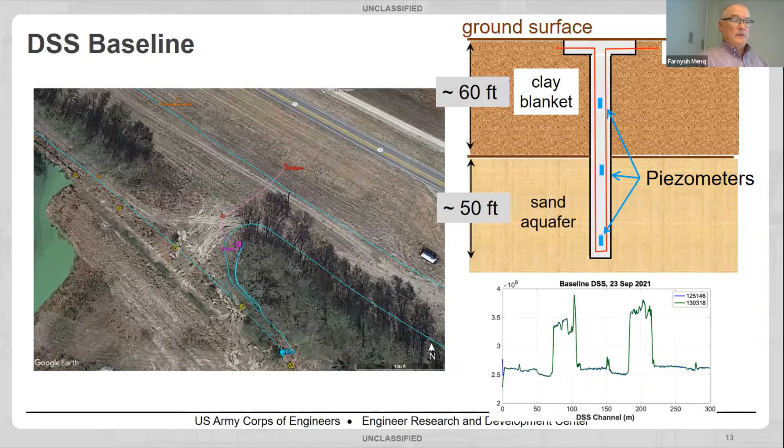I would like to acknowledge the Mississippi River Geomorphology and Potamology program who's funding this work, and Dr. Jim Lewis, you heard from him earlier. Our partners, UC Berkeley. Ling Ching, I think, built the interrogator. James Wong spent the week out here. Peter just seems to come when the weather's nice, and Li Ching was here when it was hotter than Hades. And Andrew will be here next week.

And OptaSense has worked with us. They rejuvenated our ODH3, and I think we are interested in getting their strain module and comparing the results we get with that with what we get from the DSS.

I want to thank John's branch at ERDC, the geotechnical engineering and geosciences branch, and the whole list of technicians and engineers that helped. And the Vicksburg district and the 5th Levee board helped with the permitting, and gave a lot of information that was useful.

And Dr. Maureen Corcoran, who's a geologist in my lab, GSL at ERDC; she told me about the opportunity, and helped me write the proposal and reviewed it and rewrote it. Geez. So anyway, I think we're ready.